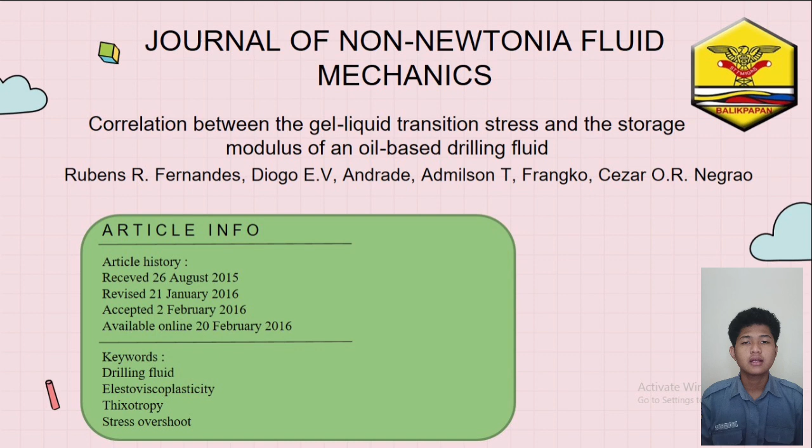Here, I want to present my paper from the Journal of Non-Newtonian Fluid Mechanics with the title Correlation between the gel-liquid transition stress and the storage modulus of an oil-based drilling fluid.

Okay, the first is the abstract. The rheological characterization of drilling fluids is crucial to ensure an adequate performance of drilling operations. These materials show elastoviscoplastic and thixotropic behaviors simultaneously, so that its gel strength is highly affected by the aging time to which the sample is subjected.

This work presents experimental evidence of a correlation between the stress overshoot observed in flow startup rheometric experiments after different aging times and the storage modulus, monitored during a low amplitude oscillatory sweep over the aging time. A comparison of the correlation with the measured data at 5 different shear rates shows that results lie within error bands

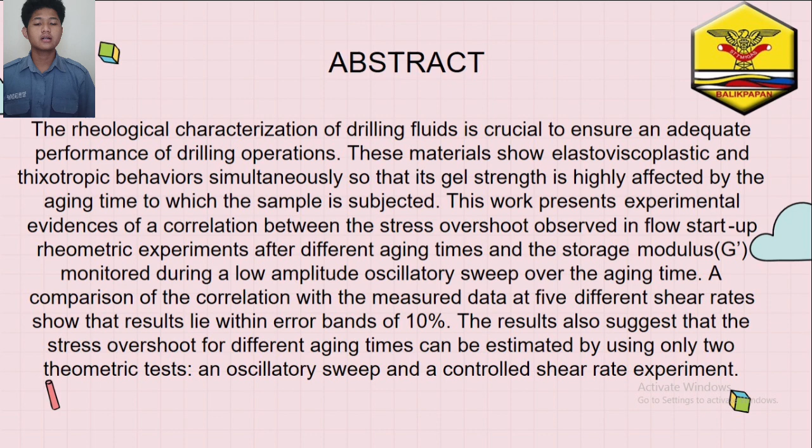of 10%. The results also suggested that the stress overshoot for different aging times can be estimated by using only two rheometric tests: first, an oscillatory sweep, and two, a controlled shear rate experiment.

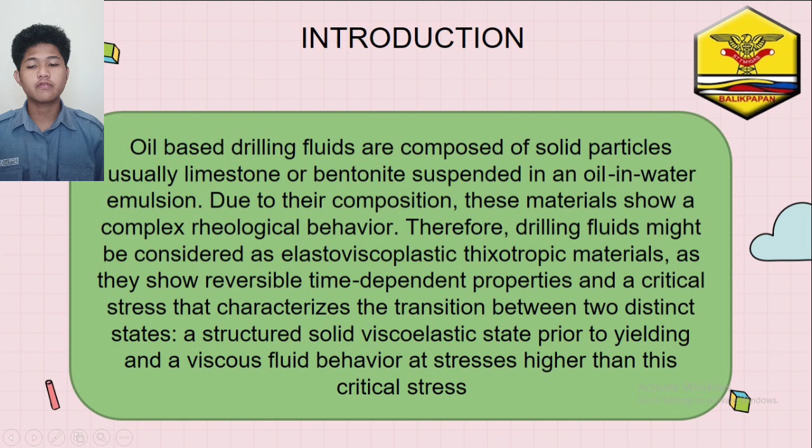Okay, next is the introduction. Oil-based drilling fluids are composed of solid particles, usually limestone or bentonite, suspended in an oil-in-water emulsion. Due to their composition, these materials show complex rheological behaviors. Therefore, drilling fluids might be considered as elastoviscoplastic thixotropic materials, as they show reversible time-dependent properties and a critical stress that characterizes the transition between two distinct states: a structured solid viscoelastic state prior to yielding and a viscous fluid behavior at stresses higher than this critical stress.

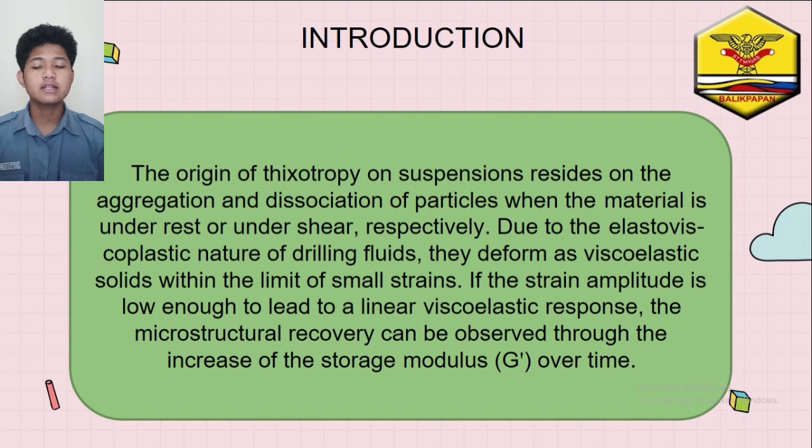The origin of thixotropy in suspensions resides in the aggregation and dissociation of particles when the material is at rest or under shear, respectively. Due to the elastoviscoplastic nature of drilling fluids, they deform as viscoelastic solids within the limits of small strains. If the strain amplitude is low enough to lead to a linear viscoelastic response, the microstructural recovery can be observed through the increase of the storage modulus over time.

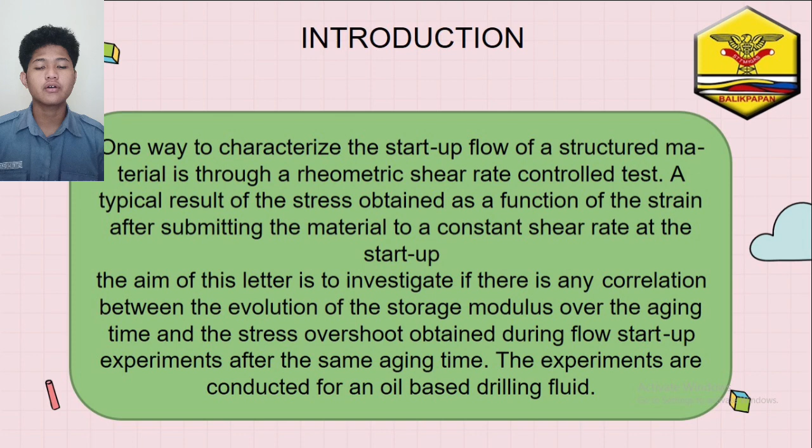One way to characterize the startup flow of structured materials is through a rheometric shear rate controlled test, a typical result being the stress obtained as a function of the strain after submitting the material to a constant shear rate at the startup. The aim of this letter is to investigate if there is any correlation between the evolution of the storage modulus over the aging time and the stress overshoot obtained during flow startup experiments after the same aging time. The experiments are conducted for an oil-based drilling fluid.

Okay, next is experiments. For the experimental study, an oil-based drilling fluid kindly provided by Petrobras was tested in two rotational rheometers, a Mars 3 and a DHR3. The temperature of all the tests was controlled at 25 degrees Celsius by using a Peltier thermostatic bath system. Prior to each experiment, the entire sample was homogenized for 2 minutes in a low-capacity industrial mixer. A new specimen was then extracted from the whole sample and placed in the rheometer.

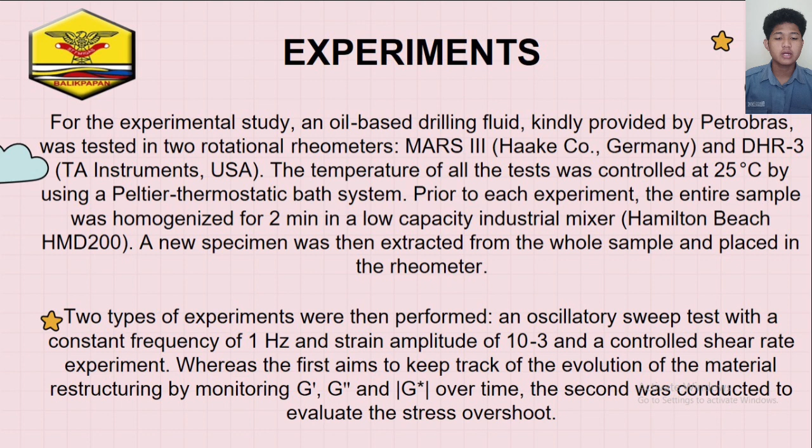Two types of experiments were performed. One, an oscillatory sweep test with a constant frequency of 1 Hz and strain amplitude of 10 to the minus 3. And two, a controlled shear rate experiment. Whereas the first aims to keep track of the evolution of the material restructuring by monitoring G' and G'' over time, the second was conducted to evaluate the stress overshoot.

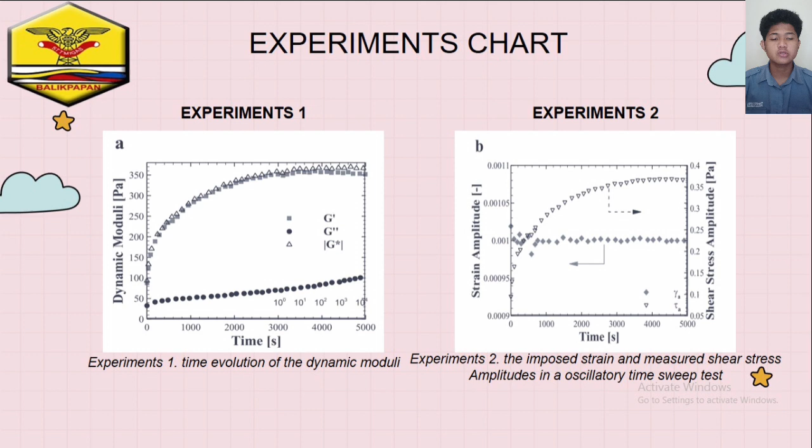Okay, next is results and discussion. The time evolution of G' and G'' is shown in experiment 1A. It can be seen that G' rises over time until reaching its maximum value after 4,500 seconds, which is a result of the material restructuring. Additionally, G' is much higher than G'', indicating the existence of a gel-like structure during the whole experiment.

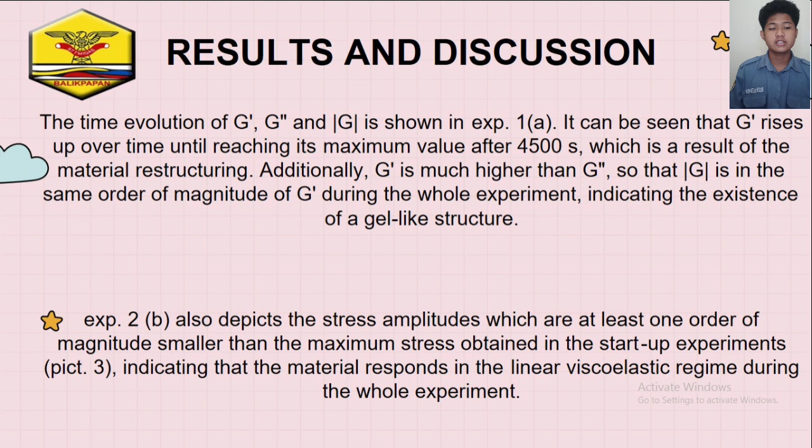Experiment 2B also depicts the stress amplitudes, which are at least one order of magnitude smaller than the maximum stress obtained in the startup experiments in figure 3, indicating that the material responds in the linear viscoelastic regime during the whole experiment.

This is the figure 3 chart. Shear stress as a function of strain for the startup shear rate test performed after different aging times. Shear rates controlled at A, 0.5 per second, B, 1 per second, C, 5 per second, D, 10 per second, and E, 50 per second.

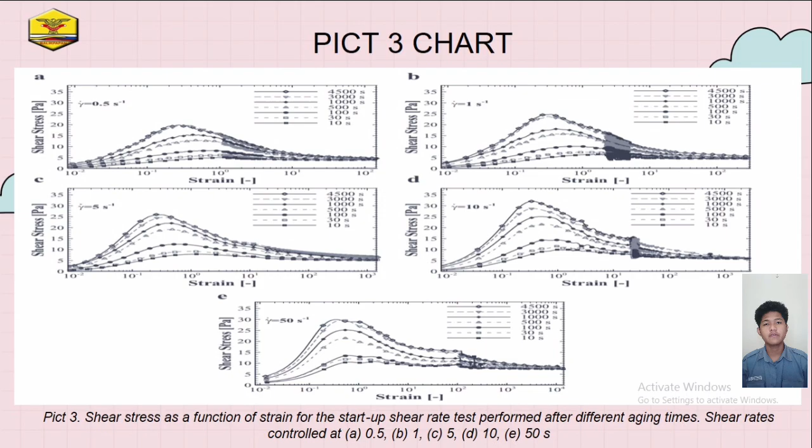Okay, results and discussion page 3. It presents the shear stress as a function of the shear strain for the startup experiments conducted at shear rates of 0.5, 1, 5, 10 and 50 per second. As shown, all results present maximum values which increase with the aging time and with the shear rate. Nevertheless, the stress overshoot is more sensitive to the aging time than to the shear rate.

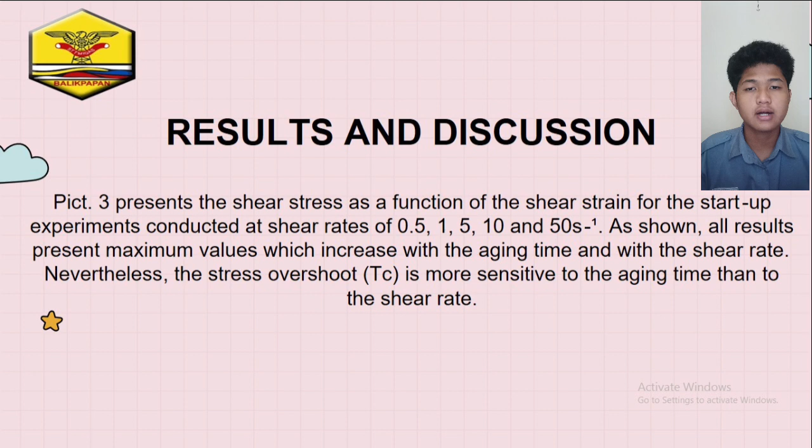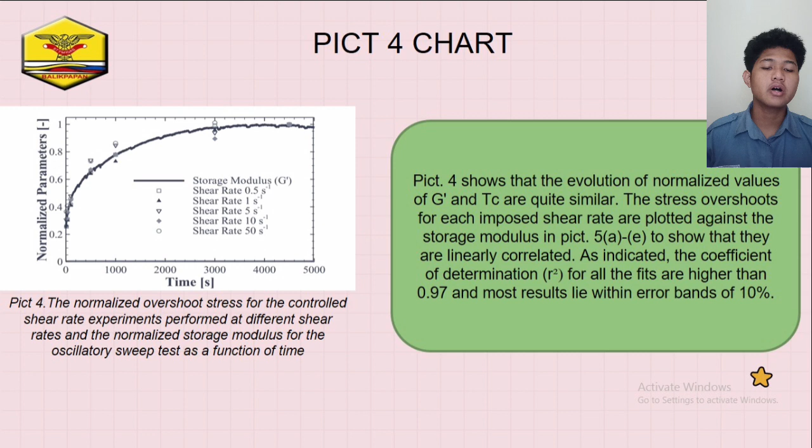Okay, next is results and discussion, page 4. Figure 4 shows that the evolution of normalized values of G' and stress overshoot are quite similar. The stress overshoot for each imposed shear rate is plotted against the storage modulus in figure 5A to E to show that they are linearly correlated. As indicated, the coefficient of determination for all the fits is higher than 0.97 and most results lie within error bands of 10%.

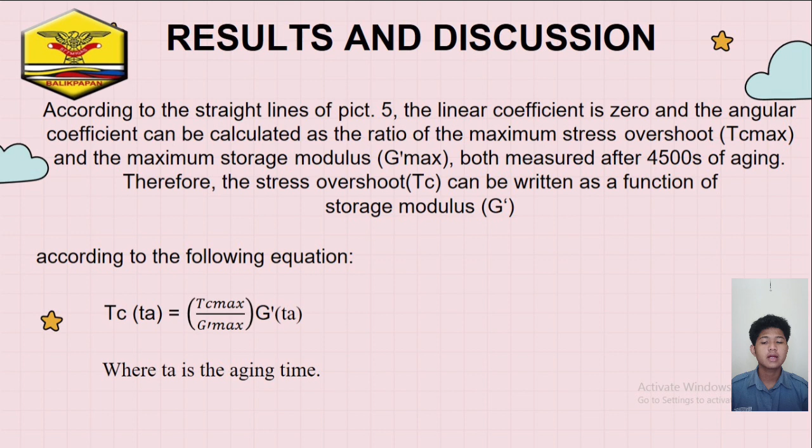Okay, next is results and discussion, page 5. According to the straight lines of figure 5, the linear coefficient is 0 and the angular coefficient can be calculated as the ratio of the maximum stress overshoot and the maximum storage modulus, both measured after 4,500 seconds of aging. Therefore, the stress overshoot can be written as a function of storage modulus according to the following equation, where tA is the aging time.

Okay, next is the conclusion. First, the results of the correlation between the stress overshoot and the storage modulus lie within error bands of 10%. Second, the correlation is observed in a range of shear rates varying from 0.5 to 50 per second. Third, the stress overshoot for different aging times can be estimated by using only two rheometric tests, an oscillatory sweep and a controlled shear rate experiment. Fourth, the stress overshoot is more sensitive to the aging time than to the shear rate.